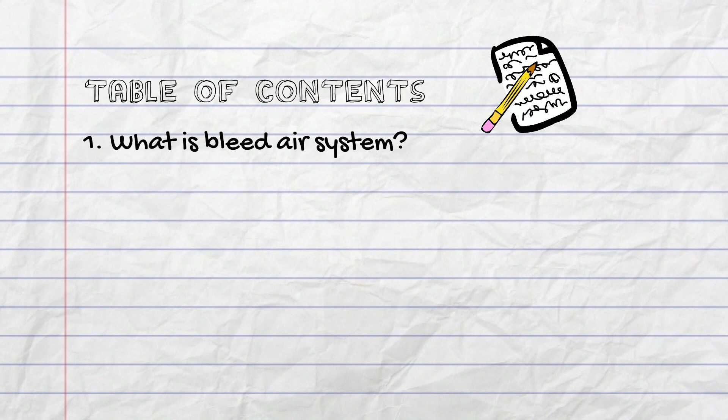In this presentation, we will explore the concept of a bleed air system, its functionality, the systems that require bleed air, and its sources. We will also delve into the role of an air-to-air exchanger and how bleed air is monitored. Lastly, we'll discuss the integration of bleed management with Integrated Modular Avionics, IMA.

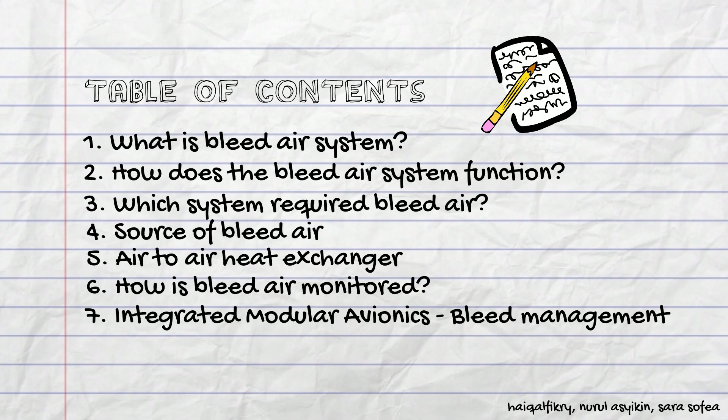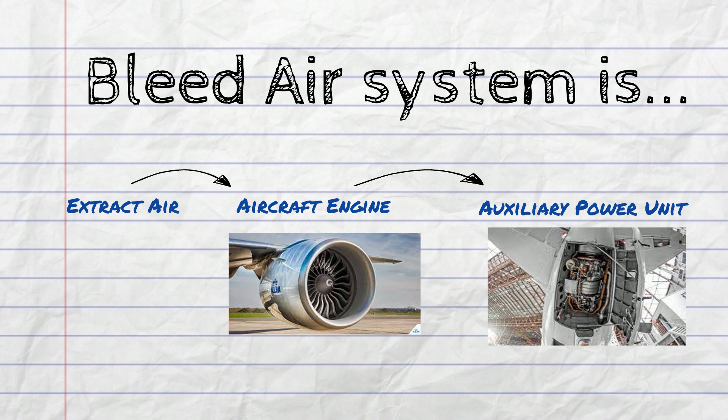Bleed air system is a system which extracts air from an aircraft's engines or takes air from the auxiliary power unit or APU and distributes it to a few other systems in an aircraft. The air is passed through different ducts, heat exchanger, valves and regulators before it is distributed to other systems. Most of the aircraft with turbofan or turboprop engines have a bleed air system.

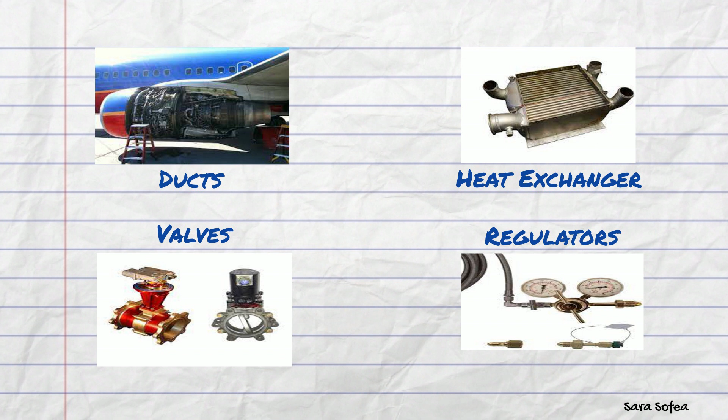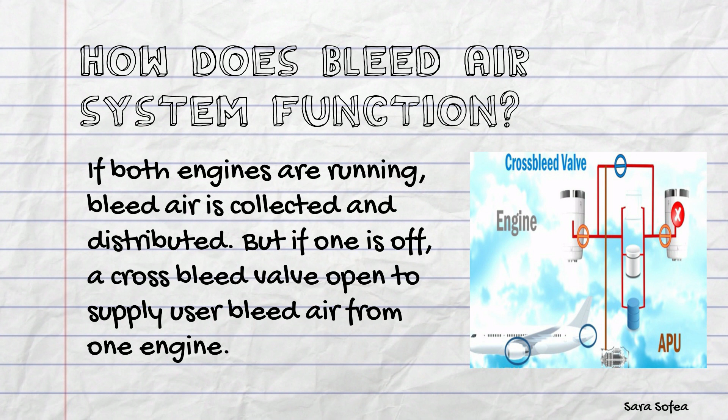If both the engines are running, bleed air is taken from both engines and then distributed, but if one of the engines is not running or not available, then a cross bleed valve opens and is used to supply bleed air for all the users from a single engine. The cross bleed valve also opens if the APU has to supply bleed air to different systems or users. Because of extracting bleed air from the engines, the efficiency and the maximum thrust produced by the engine reduces.

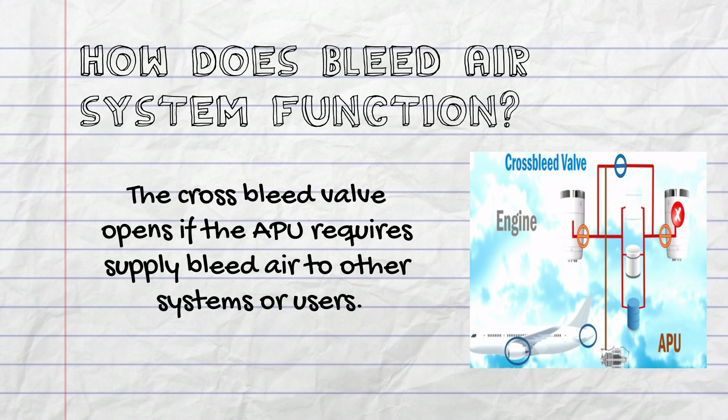For decades, aircraft have used engine bleed air for a variety of purposes, spanning everything from engine starting to cabin pressurization to anti-icing. It includes pressurization system, air conditioning system, anti-ice system, hydraulic or water reservoir pressurization and engine starter motor.

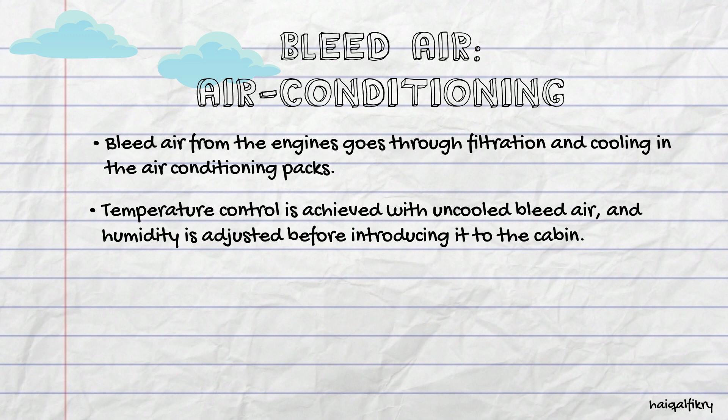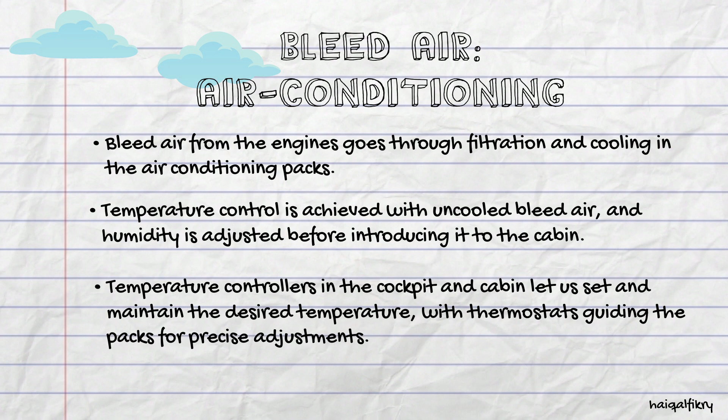Now, let's briefly discuss the uses of bleed air in air conditioning system. Bleed air is routed to the air conditioning packs where it is filtered and then cooled using an expansion process. The temperature of the air is regulated using uncooled bleed air and the humidity of the mixture is adjusted prior to introducing the air into the aircraft cabin. Temperature controllers in the flight deck and cabin allow adjustment of the target temperature, and thermostats provide feedback to the packs to demand an increase or decrease in the output temperature.

Next, we will look into the function of bleed air on hydraulic and water reservoir pressurization system. Bleed air is often utilized to pressurize the potable water holding tank, eliminating the requirement for a pump to feed the water to the galleys and lavatories. Similarly, bleed air is used to pressurize the hydraulic system reservoirs of many aircraft, reducing the likelihood of pump cavitation and the resulting loss of system pressure.

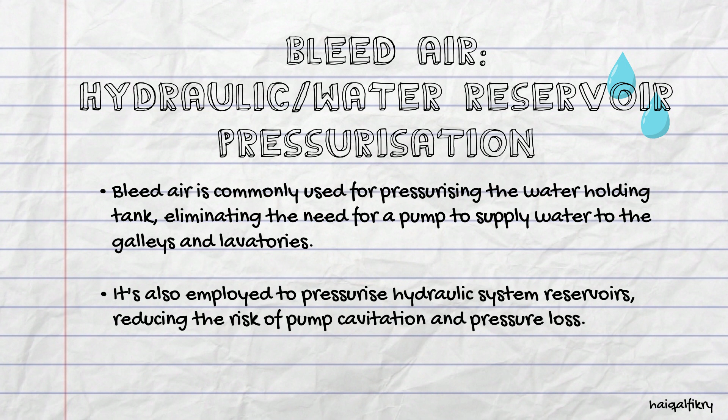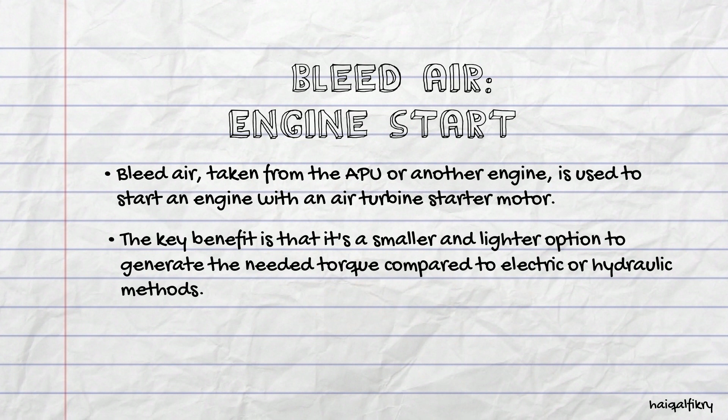Now, we will look into the use of bleed air in engine starter motor of an aircraft. Bleed air, extracted from either the auxiliary power unit, APU, or another operating engine, is used to power an air turbine starter motor to start the engine. The primary advantage of an air turbine starter is that a given amount of torque can be produced by a smaller and lighter unit than would be the case if it was electrically or hydraulically powered.

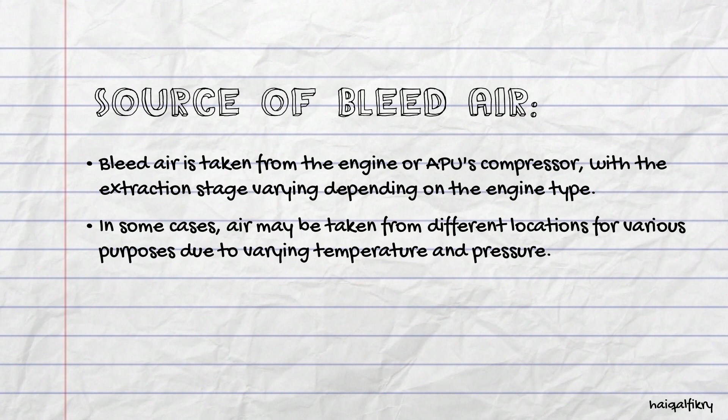Next, we will study the source of bleed air and how it has been collected and used for previous systems. Bleed air is extracted from the compressor of the engine or APU. The specific stage of the compressor from which the air is bled varies by engine type. In some engines, air may be taken from more than one location for different uses, as the temperature and pressure of the air is variable dependent upon the compressor stage at which it is extracted. Bleed air typically has a temperature of 200 to 250 degrees Celsius, and a pressure of approximately 40 psi exiting the engine pylon.

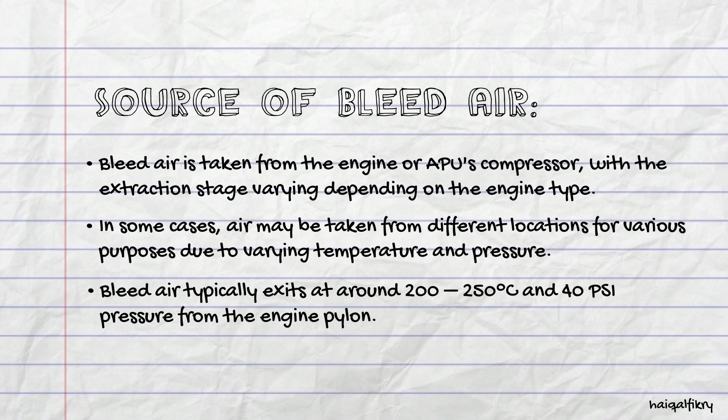Now I will explain about air-to-air heat exchanger. An air-to-air heat exchanger is used in aircraft to improve energy efficiency and reduce the load on the environmental control system. It works by exchanging heat between two separate airflows, the hot bleed air, often tapped from the engines, and the cold fresh air from outside the aircraft. The heat exchanger transfers excess heat from the bleed air to the cold fresh air, preheating it before it enters the cabin. This process reduces the overall energy consumption and improves the efficiency of the environmental control system.

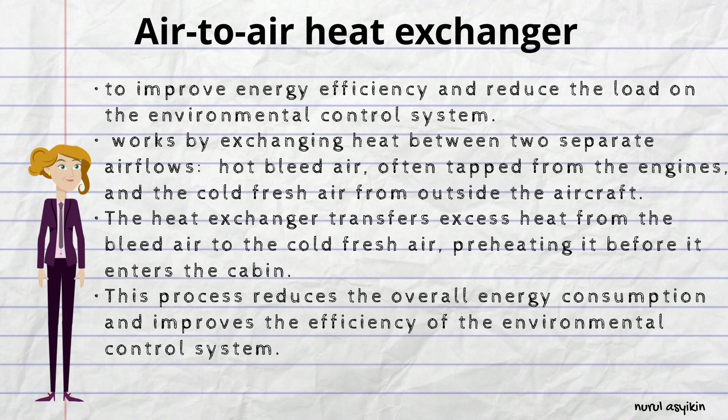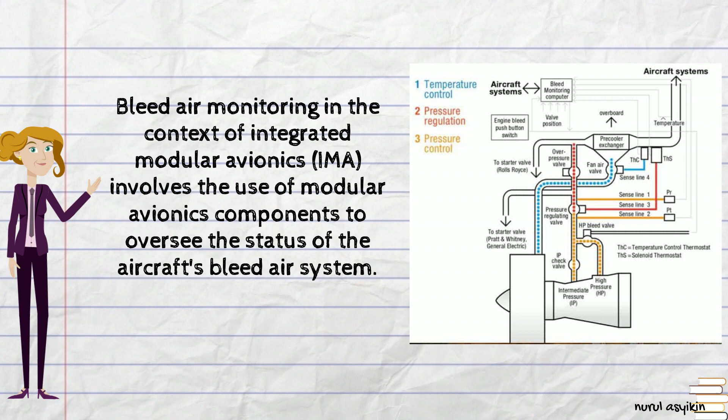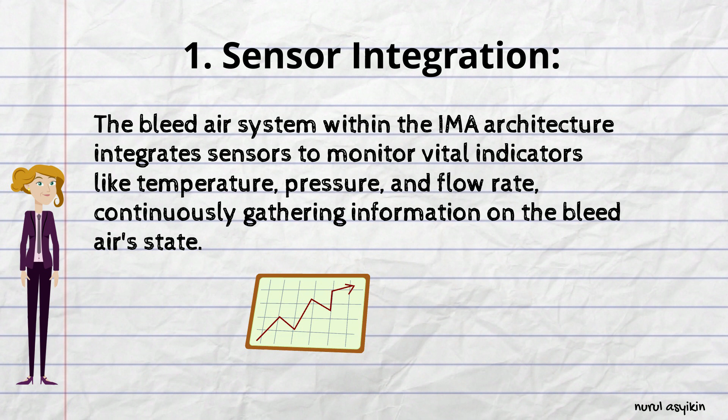First, we will see the sensor integration. Sensor integration is to monitor vital indicators like temperature, pressure, and flow rate. A number of sensors are integrated into the bleed air system inside the IMA architecture. These sensors are always gathering information on the state of the bleed air.

Next, we have maintenance and health monitoring. Maintenance and health monitoring in IMA systems often feature self-diagnostic features, monitoring the bleed air monitoring system's condition and alerting maintenance teams of potential issues requiring attention.

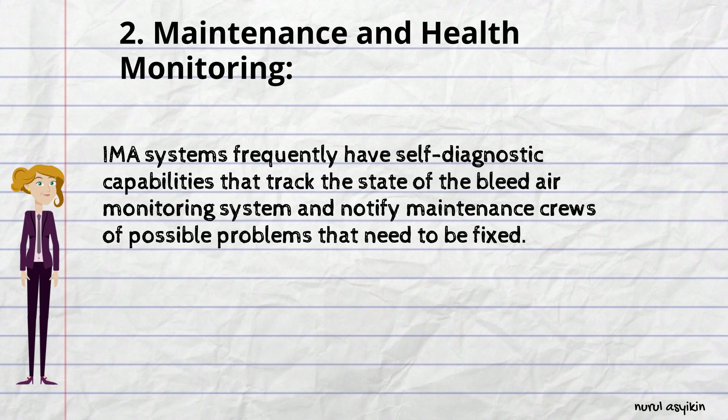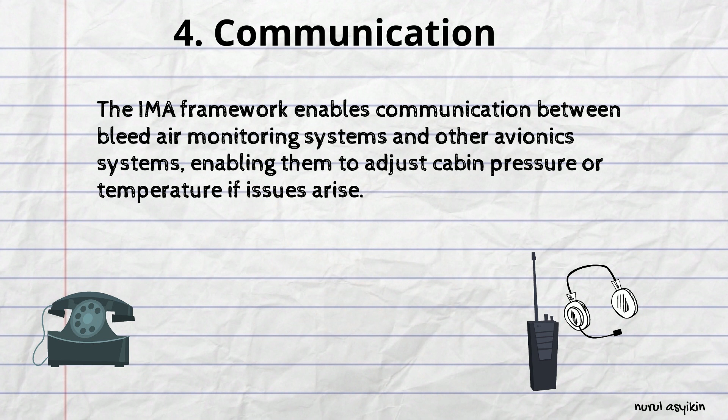Lastly, is about how bleed air is monitored through communication. The IMA framework also allows for communication between the bleed air monitoring system and other avionics systems, such as environmental control systems. For example, if the bleed air system detects an issue, it can communicate with the environmental control system to adjust cabin pressure or temperature accordingly.

After looking into the process of bleed management, now, let's see how Integrated Modular Avionics, IMA, contributes in control and monitoring bleed management of an aircraft. Let's explore how IMA functions in the context of bleed management. Firstly, IMA provides centralized control, which means it offers a single platform for effectively managing various aspects of the aircraft's bleed system. This centralized control ensures more efficient and coordinated control of bleed air across different systems.

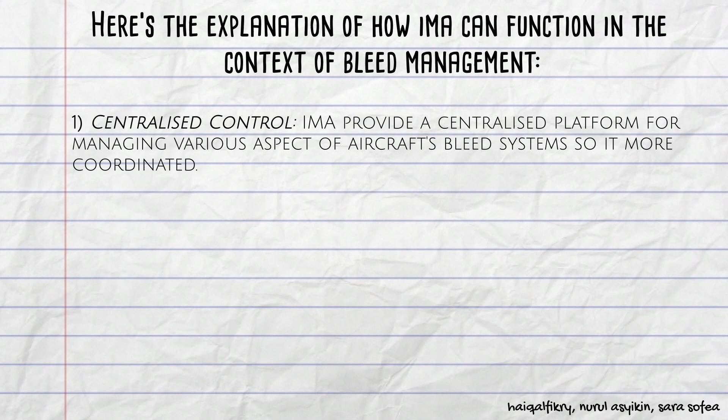Additionally, IMA excels in monitoring and feedback. IMA modules actively monitor the status and performance of the bleed air system components, including valves, sensors, and pressure regulators. Real-time data feedback from these components is processed by IMA software, enabling the system to swiftly respond to changes or anomalies.

Moving on, IMA showcases its capability in fault detection and isolation. With advanced algorithms, IMA can swiftly detect and isolate faults within the bleed system. For example, in case of a valve failure or pressure irregularity, IMA can identify the issue, contain it to prevent further system disruption, and even furnish diagnostic information for maintenance personnel.

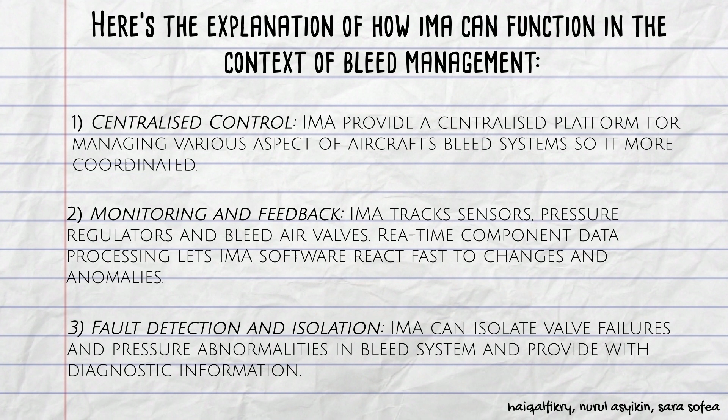Continuing, we come to two more significant advantages of Integrated Modular Avionics, IMA. Firstly, IMA architectures are designed with redundancy in mind, both at the hardware and software levels. This dual-layer redundancy ensures the uninterrupted operation of critical bleed management functions, even in the event of component or module failures, thereby elevating the overall system's reliability.

Moreover, IMA brings in the power of system optimization. By analyzing data and making real-time adjustments, IMA can fine-tune the distribution of bleed air to meet the specific requirements of various aircraft systems, such as cabin pressurization, anti-icing, and environmental control. This results in minimized energy consumption and maximized system efficiency.

Lastly, IMA's flexibility and upgradability are remarkable. It adapts to changing aircraft needs and emerging technologies seamlessly. New software applications and functions can be effortlessly added or modified within the IMA framework, eliminating the need for costly and complex system overhauls.

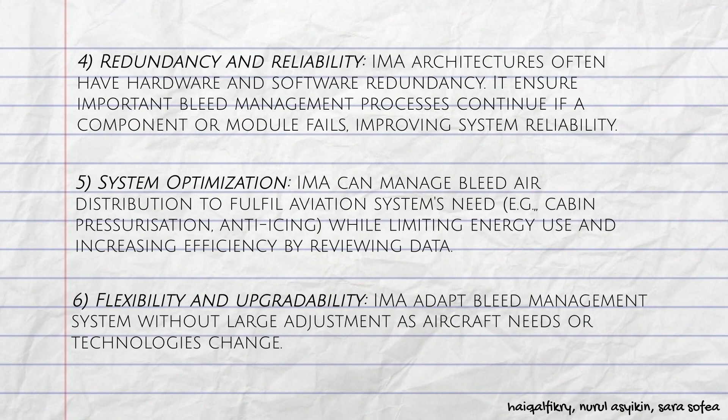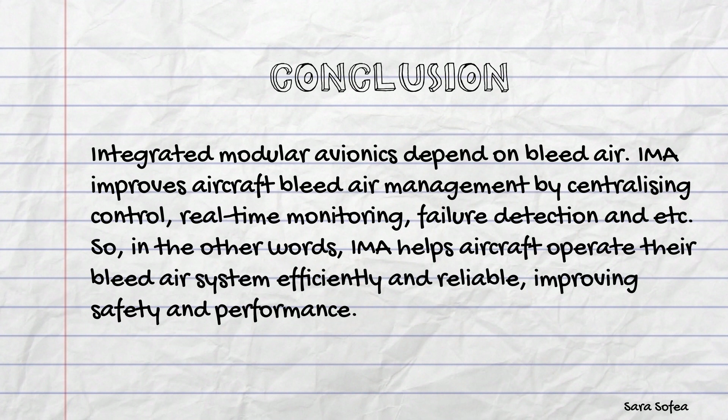In summary, IMA enhances bleed management in aircraft by providing centralized control, real-time monitoring, fault detection and isolation, redundancy, and the ability to optimize performance. By leveraging the capabilities of IMA, aircraft can ensure the efficient and reliable operation of their bleed air systems, contributing to overall safety and performance.